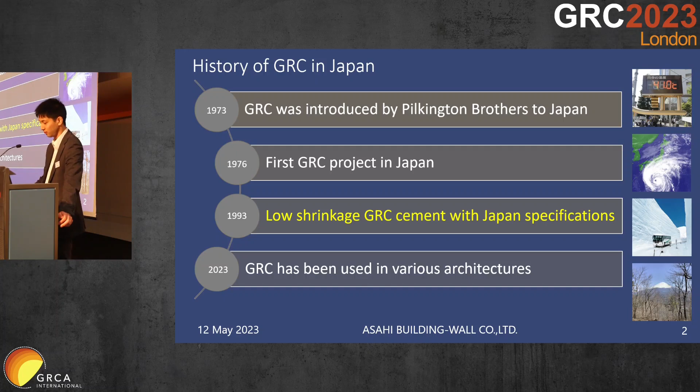Japan is very earthquake-prone. 1,976 earthquakes were observed in 2022 alone. There have also been major earthquakes causing widespread destruction to life and property. The epicenter of the 2011 earthquake was under the sea, causing large tsunami waves to ripple over much of East Japan, leading to severe damage to regions close to the epicenter.

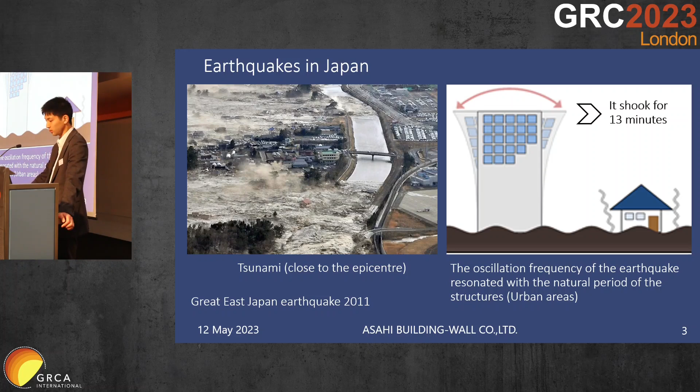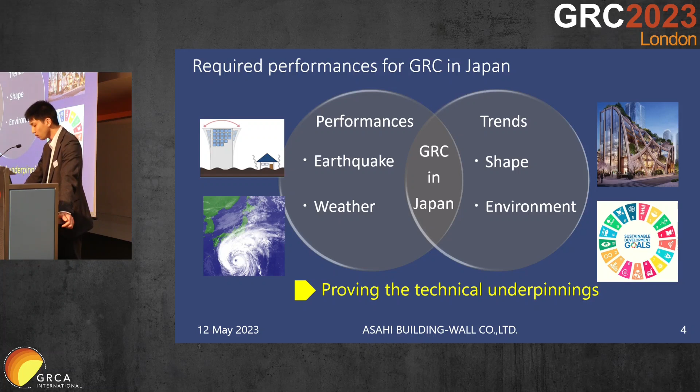In urban centers, tremors were detected. The oscillation frequency of the earthquake resonated with the natural period of the structures, sparking worries about the structural integrity of buildings in subsequent earthquakes. As a solution, GRC was used as it was lighter than precast concrete. Because of this, GRC is often used in tall structures in cities and symbolic buildings. I'll proceed to introduce some of our projects with a focus on how the engineering caters to Japan's environmental constraints and sustainability demands.

The Azabudai Hills Modern Urban Village was conceptualized as an environment that was compact and cozy like a village, while also having the sophistication of an international metropolis. The street-level design is by Heatherwick Studio. A three-dimensional net frame GRC structure is adopted to seamlessly blend the water features and greenery. Work began in 2021, and we are now in the final phase of the project. We would like to share some of the thought and engineering processes toward satisfying the environmental and design requirements.

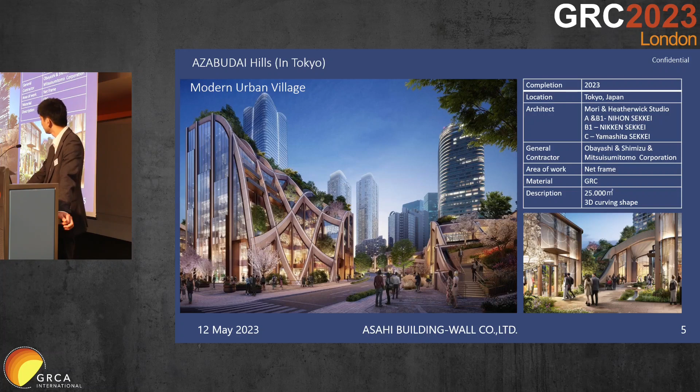Here are some of the aspects we worked on. Earthquake prevention solutions in the facade panel allocation, climate-proof finishes, implementing 3D forms with digital tools, and enhancing durability to meet sustainability demands.

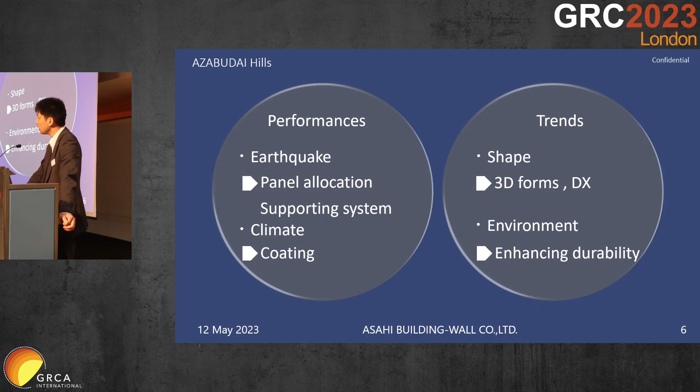Firstly, in regard to the earthquake, we usually use the sway and rock method to deal with story displacement. For this project, we avoided allocating panels that would straddle different structures and affixed all of them on the same structure. This is so we don't have to consider story displacement. The damper for the steel structure was projected to move as much as 60 mm in an earthquake. The placement was such that we absorbed the 60 mm with the seams in between the GRC panels.

The steel structure was finished on four sides with GRC, and the right picture shows this. The bottom of the pillar panel is not accessible. We adopted a method of installation that didn't need fasteners. The panels were affixed only at the top, and heat expansion and contraction would be absorbed along the length of the panel.

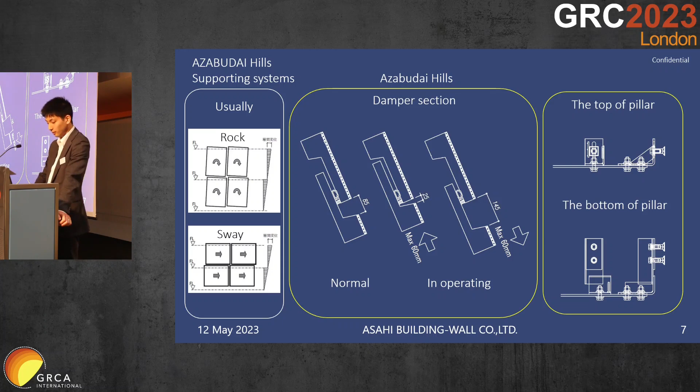In regard to the climate conditions, nearly all buildings in Japan have to have some kind of extra finish. The same applies here. Due to the special finish, we conducted specialized tests for this purpose. We performed neutralization, infrared, heat-cool cycle, and other accelerated testing on 10 types of coating, and assessed the deterioration of the exterior, the waterproofing, the surface strength, the tightness, and interior durability. We chose the best materials based on the testing results.

The complexity and number of materials defined our coating testing for this project. But typically, we do routinely conduct simpler testing for finishes.

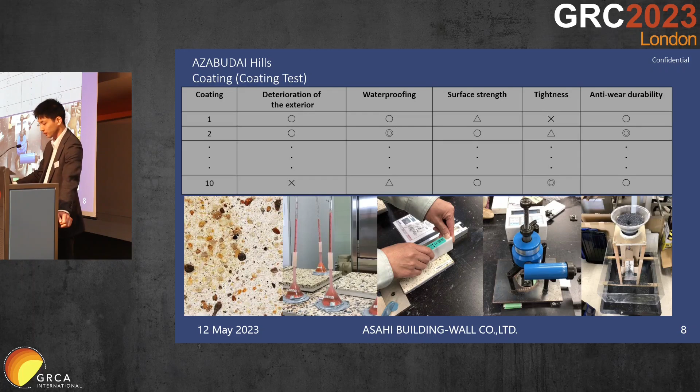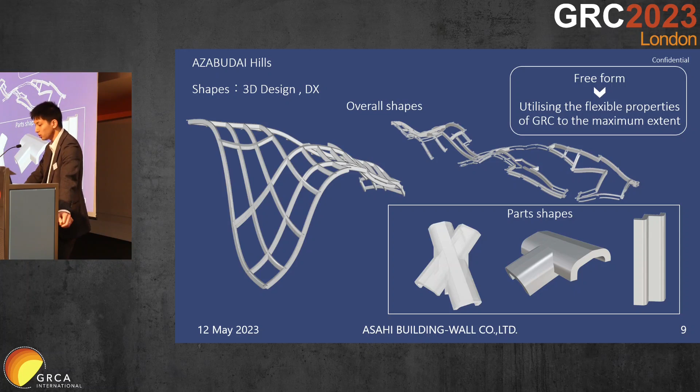In order to realize this finish, we made many samples indeed. This is an example, but we made samples with a high proportion of aggregate, a low proportion of aggregate, white cement, Portland cement, and many other combinations. We extensively deliberated on this from the early design stage.

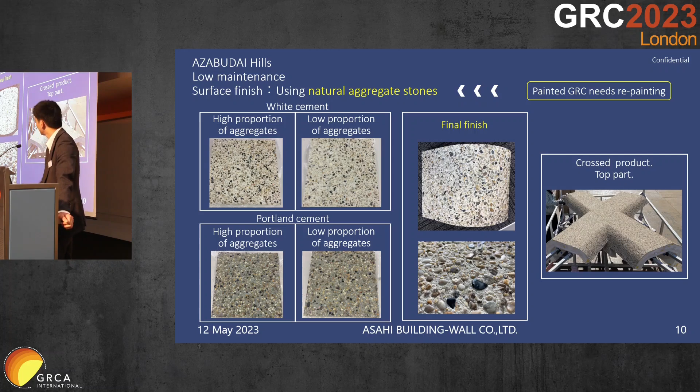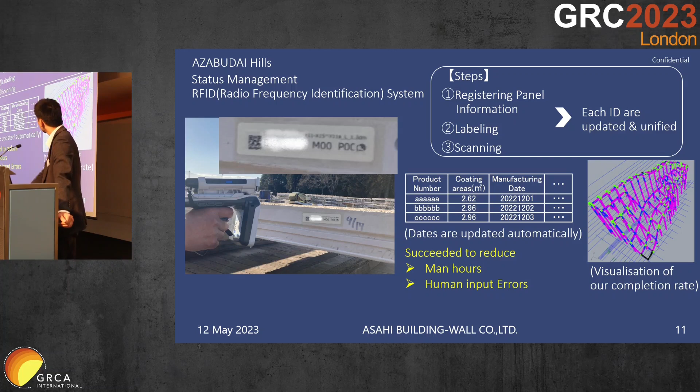The 3D model on the right shows how we visualize our completion rate. Each color represents each product. The project is ongoing, and as such, we still don't have the full view of the structure. The facility is expected to open in autumn of 2023.

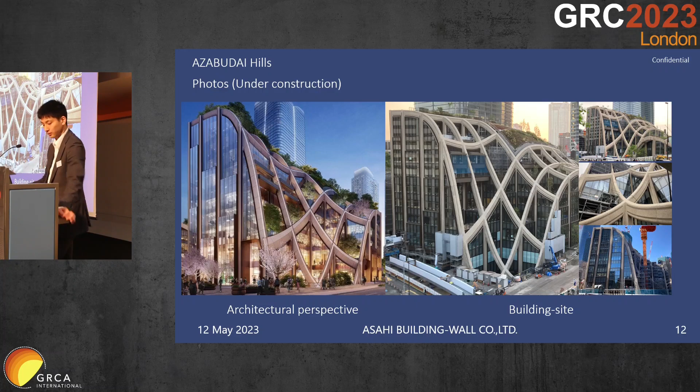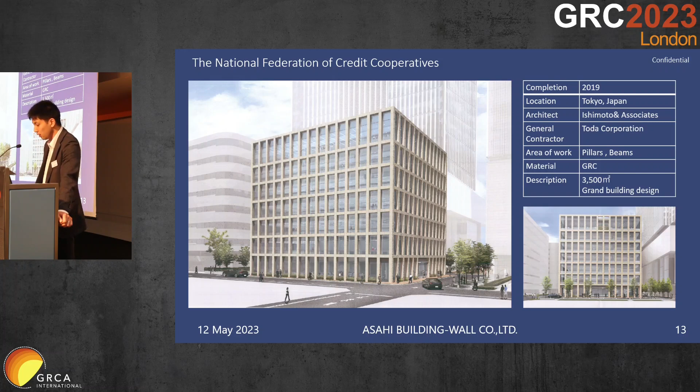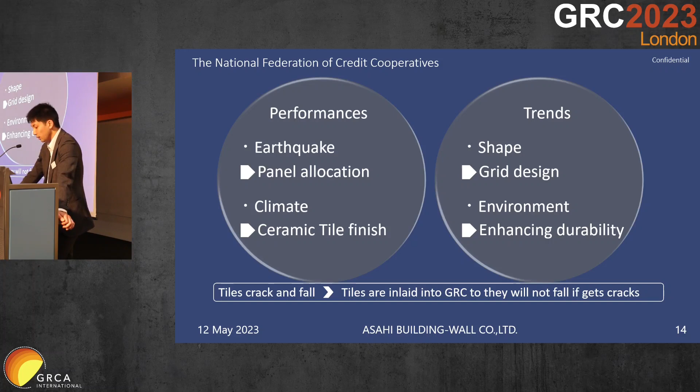Here, I would like to introduce the aspect we verified through testing. Here, we decided to eliminate consideration of structural warping by fastening all the panels to the same structure. As this decision was made very early in the building design process, the slab design was amended to accommodate the facade.

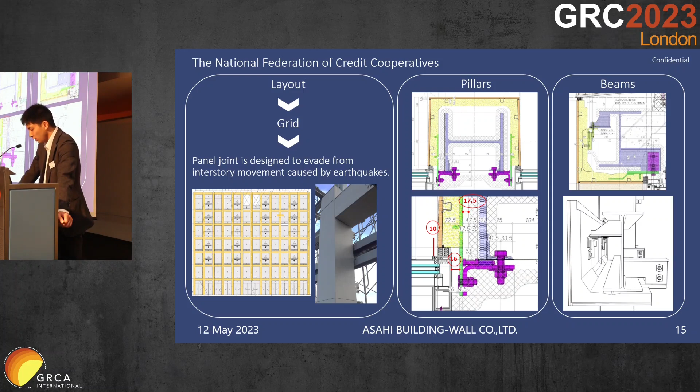In order to make the internal space look bigger, we worked on the fine details, reducing the seams and borders repeatedly. Clients emphasized that the components had to be as thin as possible. Next, I would like to talk about the finish. We use ceramic tiles here.

Tiles are normally not used in high-rises for fear of earthquakes and climate conditions. However, there has been enduring demand for the unique texture and durability of tiles. Also, Japan has made ceramic tiles indigenously since 600 AD. We have applied these traditional materials and grid structures to modern buildings.

In order to do so, we conducted multiple full-scale strength and destruction tests to verify its safety. In this test, we determined that the material was able to bear loads 20 times as much as the conditions we were given. We managed to realize the use of traditional large-scale ceramic tiles while giving ample consideration to the environment.

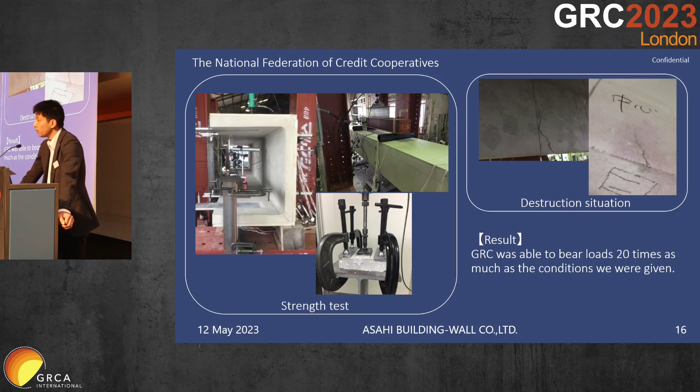We approach the technical underpinnings from many perspectives to ascertain the safety of the product. If you encounter difficult technical challenges, please let us share the opportunity to take up the challenges together.